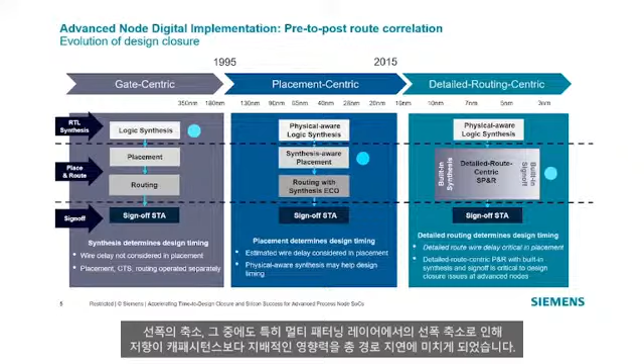The most recent shift is when moving to 16 nanometer and smaller process nodes. Because of shrinking line widths, particularly in multi-patterning layers, resistance has become more dominant than capacitance in the total path delay, and wire resistance depends not only on the length and width of the wires, but also on the detailed routing topologies such as routing layers, vias, and routing patterns, all of which need to be understood in the placement stage.

This forms the basis of the detailed routing centric approach that we will describe in more detail in the latter section of this presentation. To visualize how traditional placement-centric approaches suffer severe correlation problems between pre-route timing estimation and actual post-route timing, use the correlation plot shown.

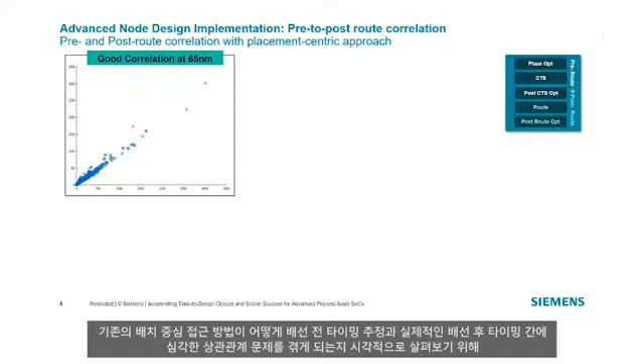Here, perfect correlation would be a single line at a 45-degree angle, while differences in pre- and post-route timing are noted as points that diverge from that 45-degree middle line.

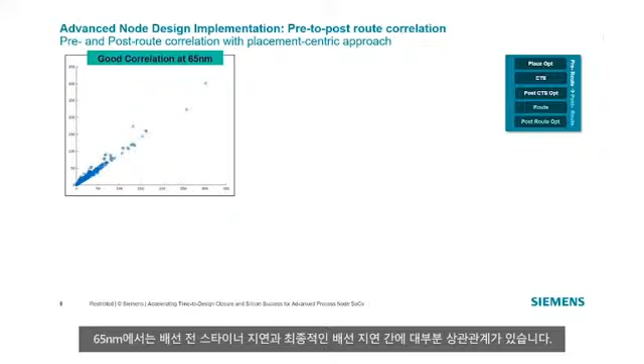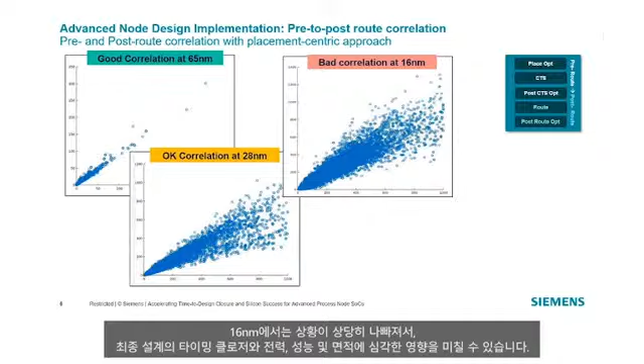At 65 nanometer, the pre-route Steiner delays versus final routed delays are mostly correlated. At 28 nanometers, the correlation starts to diverge a bit, but is still generally acceptable. At 16 nanometers, it gets quite bad and can severely impact timing closure and power performance in the final design. Finally, at 7 nanometers, we have an almost random plot where the predicted delay in the pre-route stage has almost no bearing on the post-route delays.

To summarize, at advanced process nodes, placement engines cannot produce convergent results without information on detailed routing topology today, which is a shift in the basic factors considered by traditional placement and route tools that assume detailed routing only comes after placement and placement-based optimization.

The second challenge we mentioned was the explosion in the number of multi-corner multimode scenarios, or MCMM scenarios for short. The number of scenarios in MCMM timing and optimization is based on the number of process, voltage, and temperature, or PVT, corners, as well as the number of design modes that all need to pass static timing analysis.

The biggest culprit behind this rapid increase is the large number of PVT corners needed for sign-off STA. Today, at 7 nanometers, having 50 to 100 PVT corners used at sign-off is quite common, compared to only a handful of PVT corners required at 65 or even 40 nanometer designs. There's no longer a best case or worst case corner, so many corners in between all have to be timing validated.

For the same reason, optimization at the implementation stage, and especially ECO changes, have to be internally timed for a large number of MCMM scenarios so that the end result matches final sign-off STA.

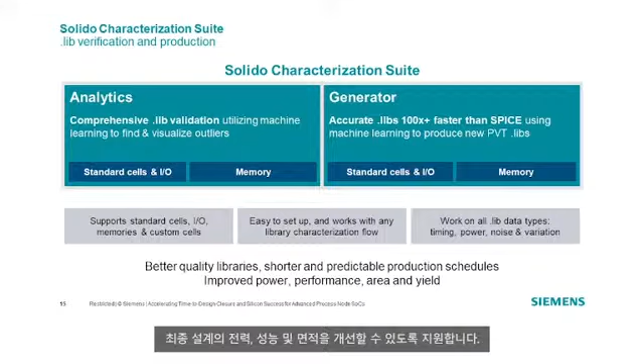Solido Analytics is designed to be a lightweight, yet complete solution for .lib verification. Our users don't have to be experts in library characterization, although library teams will definitely appreciate what the tool offers. It verifies .libs using a combination of rule-based checks, machine learning outlier detection, and a full set of .lib comparison capabilities, all supported by a Liberty Visualizer GUI that allows users to quickly and effectively explore .lib content and investigate any issues that are uncovered.

Overall, Solido Analytics helps library and design teams fully verify .libs in hours instead of weeks, and also helps digital implementation teams catch .lib issues before going into production.

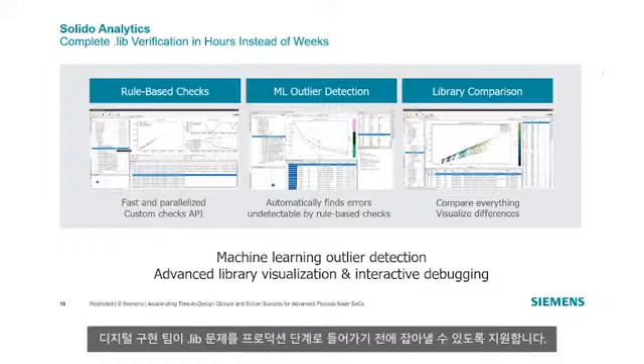The rule-based checks in Analytics are fast and parallelized, provide all static checks required to make sure Liberty models are structurally correct, and also includes an API to add in any new validation rules not covered by the built-in rule set.

This is a check that's especially useful to ensure post-route timing and power analysis match that of the earlier stages in the flow. If a violation like this is found, the library visualizer can show the user exactly where the violation is from, as well as allow the user to click into any of the points of interest and show related information from those points.

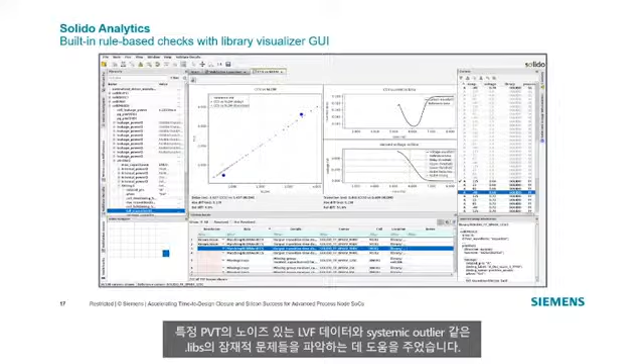This is one of the many useful features of Library Visualizer, and in fact all of the plots shown earlier in this presentation that help identify potential issues with the libs like noisy LVF data and systemic outliers in certain PVTs were all provided by Solido Analytics.

The machine learning outlier detection engine in Solido Analytics is one of its unique advantages.

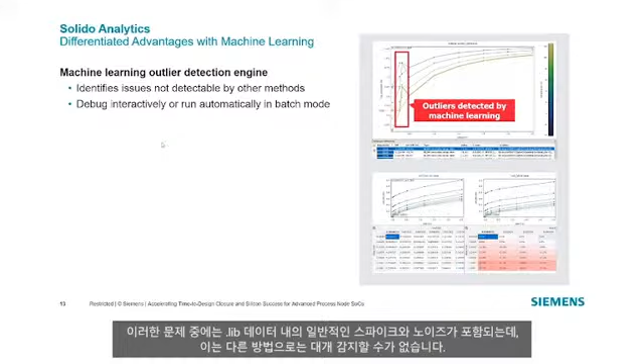It starts with building a machine learning model of the entire .lib dataset. Then, by comparing all data points in the .lib to expected values in the machine learning model, analytics can identify outliers in the .libs. These issues include general spikes and noisiness in .lib data that are typically not detectable with other methods. The Library Visualizer interface provides the flexibility to customize plots and compare multiple Liberty files in minutes.

Because it's connected directly to .lib data, it also allows for single-click .lib file entry from the GUI to explore the contents of the .lib files and quickly debug issues where found.

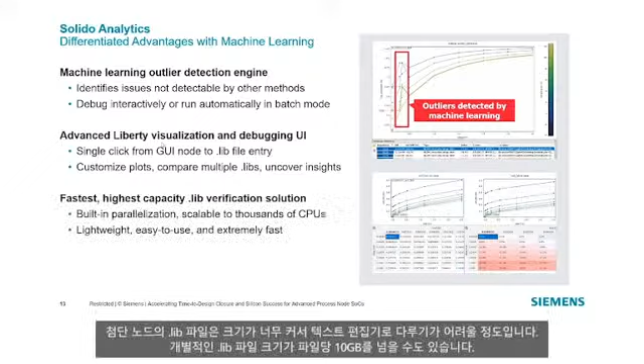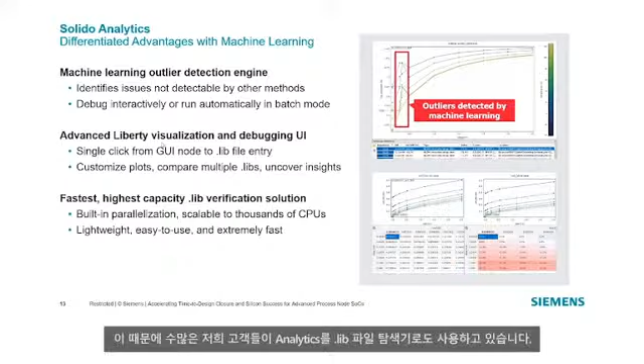.lib files at advanced nodes are notoriously large, to the extent that text editors have a hard time handling them. Individual .lib file sizes can be more than 10 GB per file. Analytics has the capacity and performance to read in these large .lib files without slowdown, and is scalable to thousands of CPUs if needed. Because of this, many of our customers also use analytics as a .lib file explorer.

Let's talk about Solido Generator. Unlike analytics, which is a standalone .lib verification tool, Solido Generator is a tool that uses machine learning to produce .libs in new PVT corners using existing .libs as anchor data.

Place and route teams often need a particular combination of process corner and temperature that isn't provided in the original set of .libs. In many cases, setting up and running a complete characterization environment for the corners required isn't feasible. This is where Generator comes in.

Shown here is a high-level flow of how Generator works. The user provides anchor corner .libs to the tool and specifies the required new PVT corners. Solido Generator then builds a machine learning model from these anchor .libs provided by the user in order to create .libs of the new PVTs requested.

Generator is not a replacement for your characterizer tool. Rather, it's characterization tool independent and can be used on top of your current characterizer to speed up .lib production, because it uses machine learning to produce .libs in a fraction of the runtime compared to SPICE.

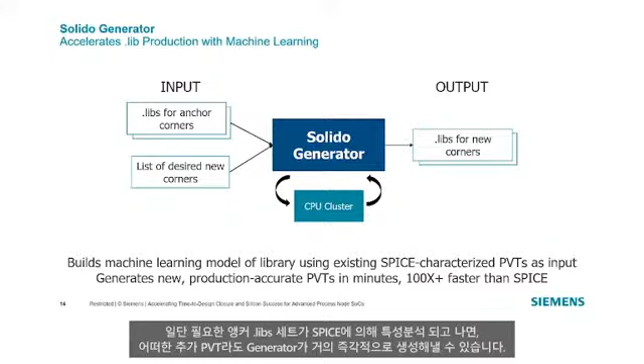The minimum number of PVT corners depends on the library and process node, and we've worked with many customers to help them set up a flow that works for their needs. Once the required set of anchor .libs are characterized by SPICE, any additional PVTs can then be produced by Generator almost instantly.

Some customers have asked us why they should use Generator instead of the voltage scaling capabilities in STA tools. Well, one reason is that Generator is much more accurate. We've worked with many customers that previously used voltage scaling or interpolation to substitute for missing corner .libs, and Generator's results have consistently been more accurate than STA voltage scaling.

More importantly, Generator produces actual .lib files, so users can run the same kinds of checks and validations that they use for the original characterized libraries and validate the accuracy of Generator's results. These .lib files can also be used in other parts of the flow, such as multi-mode multi-corner optimization.

Compared to SPICE, Generator produces .libs about 100 times faster than SPICE characterization, meaning it can produce entire new PVT .libs in minutes instead of days.

So place and route teams can quickly create accurate .libs that they need and not resort to using rough estimations while waiting for actual .libs to be provided.

Since the tool uses .libs as inputs, there is no dependency on Foundry PDKs or SPICE methods. In addition, because Generator uses the existing .lib set as anchor data, the output is by construction already aligned with your original PVTs. This is important because many .lib providers have custom margins and offsets built into the characterized .libs, which causes any new PVT characterized from scratch to be misaligned with the original set of PVTs.

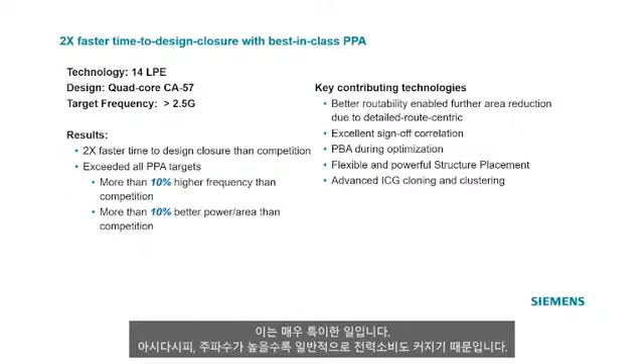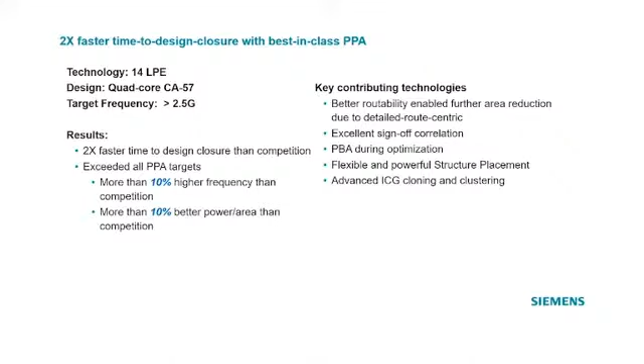As you can see, Aprisa performed very well in this project. It not only completed the project much earlier than the competition, it also achieved 10% better timing and 10% better power and area simultaneously. This is very unusual because, as you know, higher frequency usually causes higher power. But Aprisa delivers not only higher frequency, but also lower power. As a result, the design team VP said in a quote that Aprisa enables us to significantly reduce area and power while increasing the performance of our latest design.

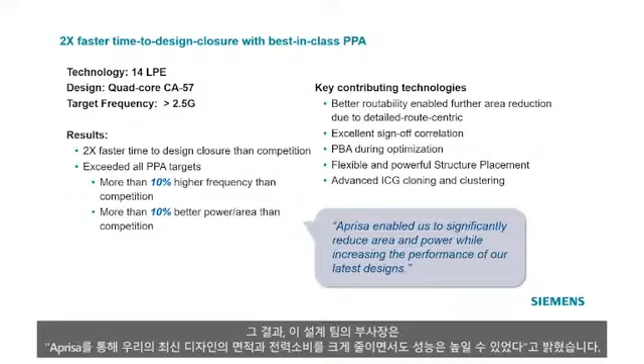In fact, this kind of feedback happens quite often within our customers. Here we summarize a few feedbacks from our recent customer projects. As you can see, our customers are using Aprisa very successfully on a wide range of applications, such as networking design, image sensor, power management, graphic core, processor core, mobile design, and military and aerospace IP.

Aprisa also performed well not only at advanced nodes, like 7 nanometer, but it is also very good for 16 nanometer, 65 nanometer, even 180 nanometers. So, if we summarize the common feedback from our customers, you can see that Aprisa is very well correlated with sign-off tools, with very good pre-route and post-route correlation. It's very easy to adopt—one reference flow can apply to all their designs. And it delivers very competitive PPA. So overall, Aprisa has fast design closure with better PPA.

Finally, I would like to summarize today's webinar. We talked about the increasing process and design complexity at advanced nodes making design closure much more difficult. This includes worsened process variation, exploding numbers of MCMM scenarios, impact from resistance domination of design timing, and the growing number of complex IP.

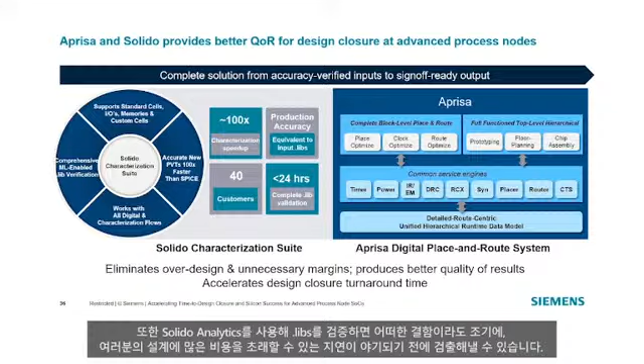Through our webinar, I hope you learned that the combination of Solido Characterization Suite and Aprisa place and route solution can help reduce the time to design closure of your design project. You can leverage the machine learning-based Solido Characterization to reduce your .lib generation time by more than 100x. You can also validate your .lib with Solido Analytics to detect any defects early before they cause expensive delays for your design. Finally, you can adopt Aprisa's detailed route-centric place and route technology and excellent correlation with sign-off to reduce your time to design closure and achieve better PPA for your design.